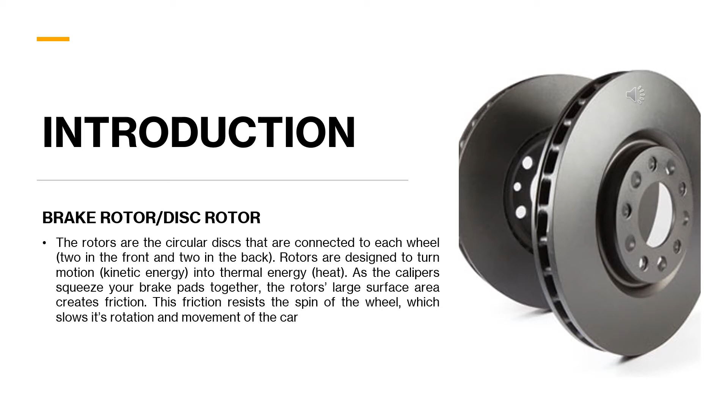As required in the assignment, the automotive component I selected is the brake rotor, also known as the disc rotor. As introduction, rotors are circular discs connected to each wheel, 2 in the front and 2 in the back. The rotors are designed to turn kinetic energy into thermal energy. As the calipers squeeze the brake pads together, the rotor's large surface area creates friction, and this friction resists the spin of the wheel, which eventually slows its rotation and the movement of the car.

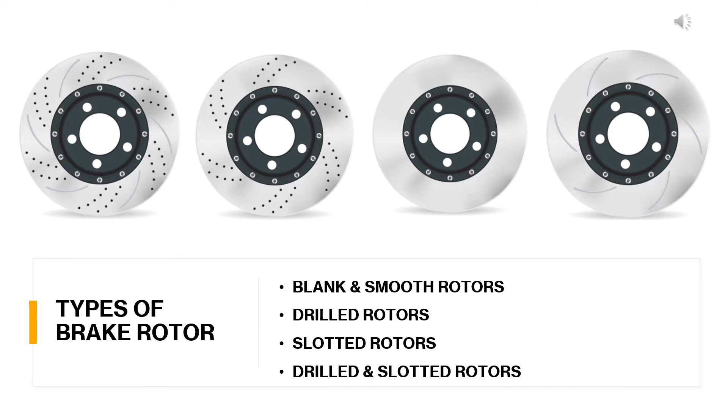For the types of brake rotor, there are a total of 4 types that are commonly used by the automotive industry: blank smooth rotors, drilled rotors, slotted rotors, and finally drilled and slotted rotors.

Next I will explain the material used for the manufacturing process. In earlier days, these brakes were made straight from molten brittle ceramic materials, but researchers found that short carbon fibers would be a solution for the brittleness of the ceramic. Hence, they used short carbon fibers, carbon powder, and heat molded resin as new materials for manufacturing the composite brake disc.

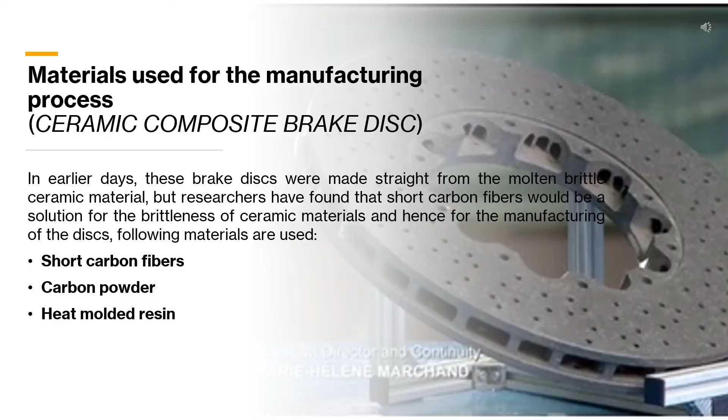Next I will explain the manufacturing process of the brake rotors. The following flowchart shows the basic or common manufacturing process of the brake rotors from start to end, starting with mixing raw material, and the last step is inspection.

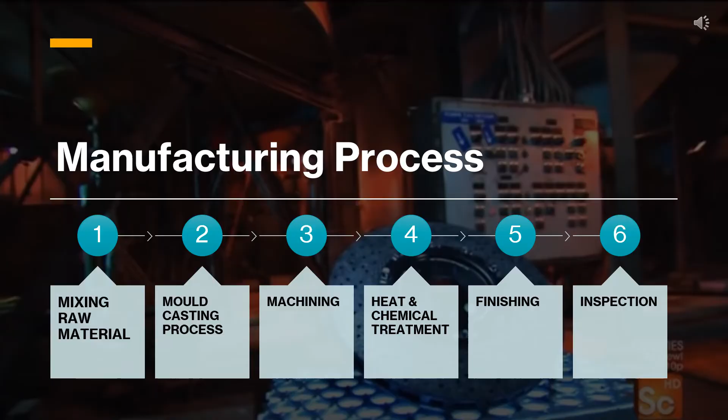The first step is mixing raw material. The short carbon fibers, carbon powder, and heat molded resin are mixed together as the foundation for the next casting process. The mixture is poured into a permanent aluminum mold cavity, shaped as the brake disc, using an automated machine until it is half full.

Once it's half full, the mold is removed and workers insert aluminum cores into the belt, with gaps around the mold that allow the cores to be inserted. This core will form a ventilation cavity in the disc ring to prevent the disc from overheating.

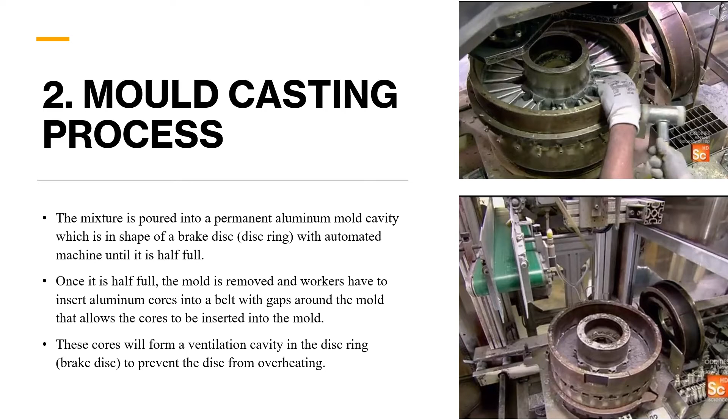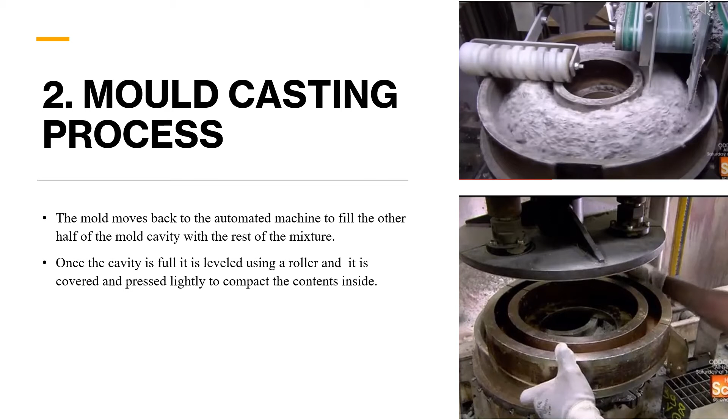The mold moves back to the automated machine to fill the other half of the mold cavity with the rest of the mixture. Once the cavity is full, it is leveled using a roller, then covered and pressed lightly to compact the content inside.

The mold is sent to a large press which applies 20 tons of pressure and heat up to almost 400 degrees Fahrenheit. This heat and pressure compact the carbon fiber and resin into plastic, making it stronger.

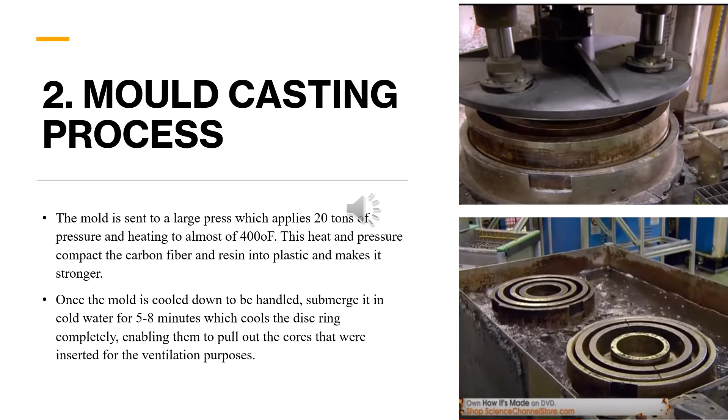Once the mold is cooled down and handled, it is submerged into cold water for 5 to 8 minutes, which cools the disc ring completely, enabling the cores inserted for ventilation to be pulled out. Once all the cores have been removed, the cover of the mold is removed and the disc ring is extracted from the mold. Next is the machining process.

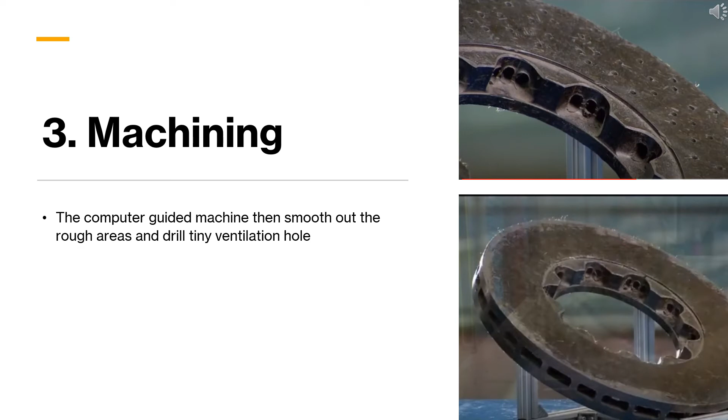The computer-guided machines then smooth out the rough areas and drill tiny ventilation holes in the brake disc.

Next is the heat and chemical treatment. The disc ring is put into an oven where, over 2 days, it is gradually heated up to 1800 degrees Fahrenheit. This causes a chemical change which transforms the plastic into carbon.

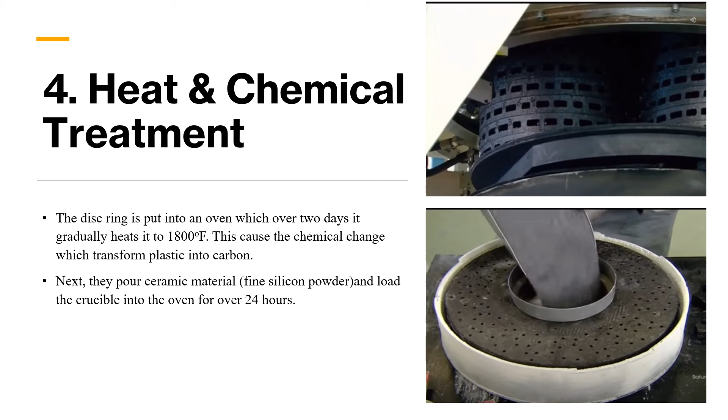Next, they pour in the ceramic material, which is fine silicon powder, and load the crucible into the oven for over 24 hours.

Next is the heat and chemical treatment. The disc ring is then put into a chamber where it receives a coat of protective paint. The paint shields the carbon in the disc from oxygen, which is critical because at high heat, oxygen burns carbon. The paint is cured in an oven, leaving behind a white residue.

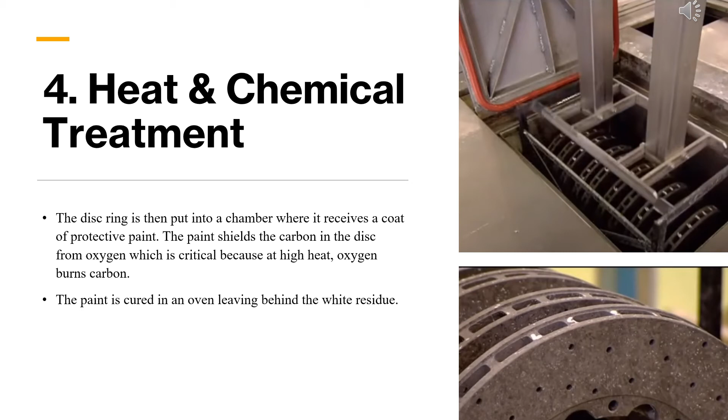Next is the finishing process. The automated robot arm will sand and polish the entire surface of the brake disc for the final finishing.

Lastly is the inspection process. After polishing is completed, a computer-guided machine thoroughly inspects the disc ring surface by taking high-definition photographs to further examine the molecular and crystal structures to detect any defects. The computer will analyze the brake disc at the micron level of detail.

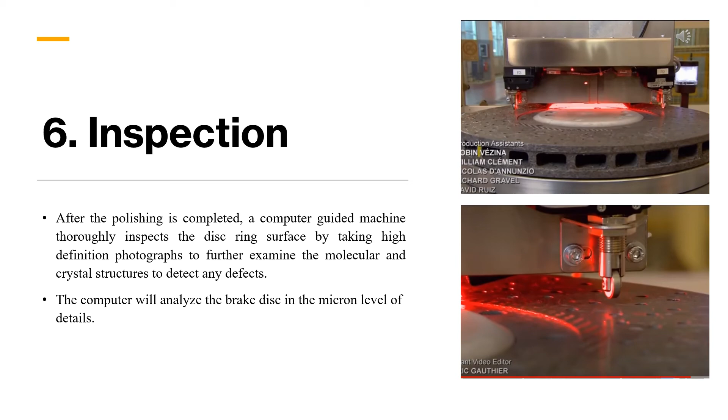For the simulation part, a total of 2 simulations were carried out on the brake rotors: a compression test and a thermal distribution test, using 3 different materials - aluminum alloy, cast iron, and ceramic.

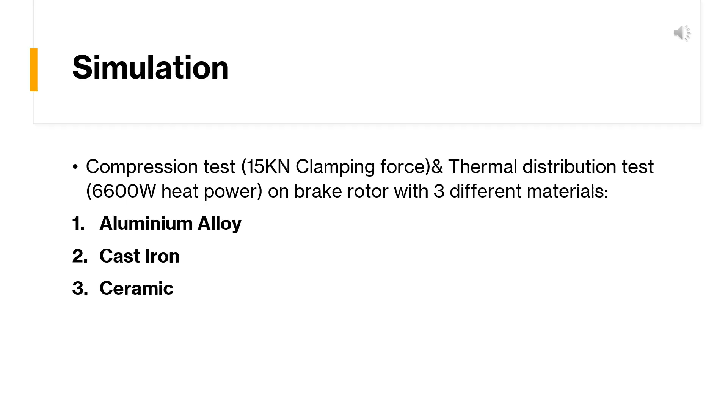These are the results from the compression test with a force of 15 kN respectively. As a result, all 3 materials show that they can withstand the clamping force perfectly, and the maximum stress occurring on the brake disc is only slightly different, with ceramic material having the highest maximum stress.